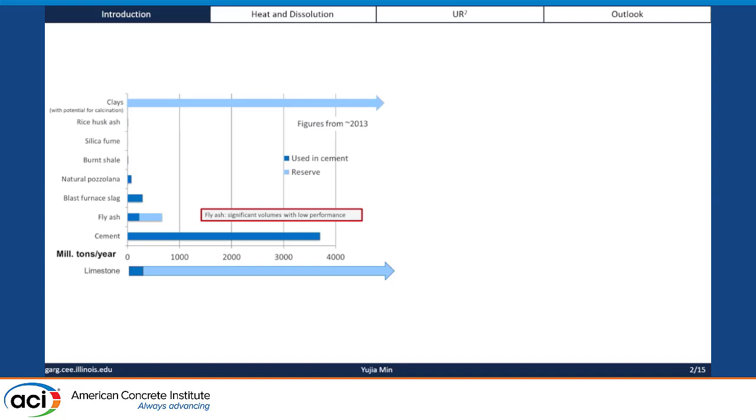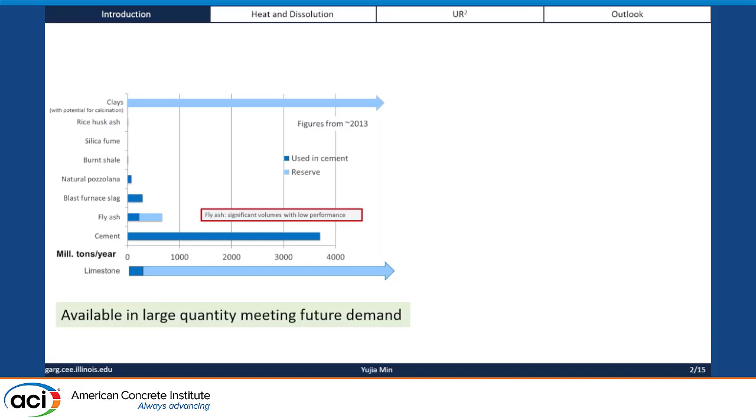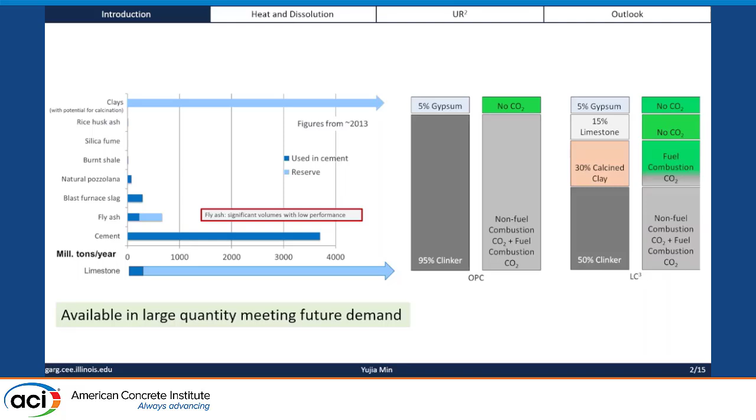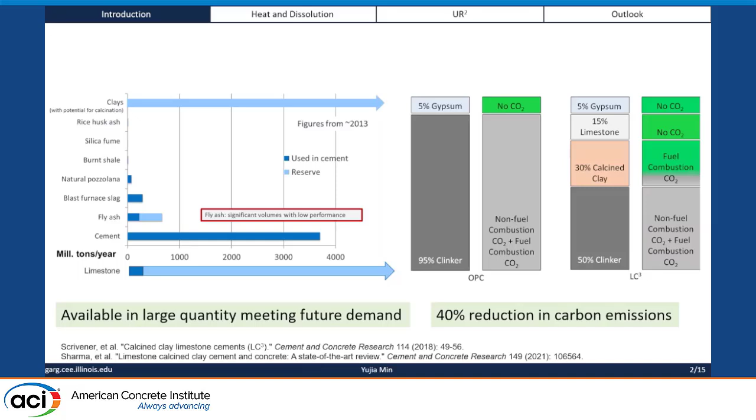So first, a bit about background. As many of you may know, the supply of traditional SCMs like fly ash is becoming limited, and people have compared the availability of different sources and concluded that natural clay minerals may be the only option that fits future demand for SCM. These clays are further developed into LC3, limestone calcined clay cement, which can replace about 50% of cement and decrease the carbon footprint by 40%. Considering this availability and sustainability, calcined clays are considered one of the promising future SCMs.

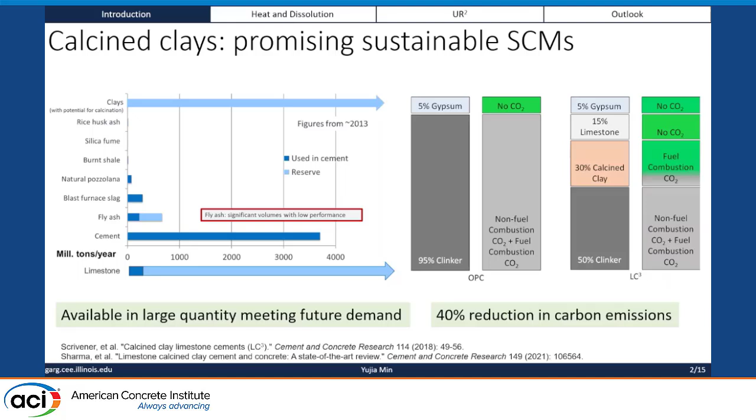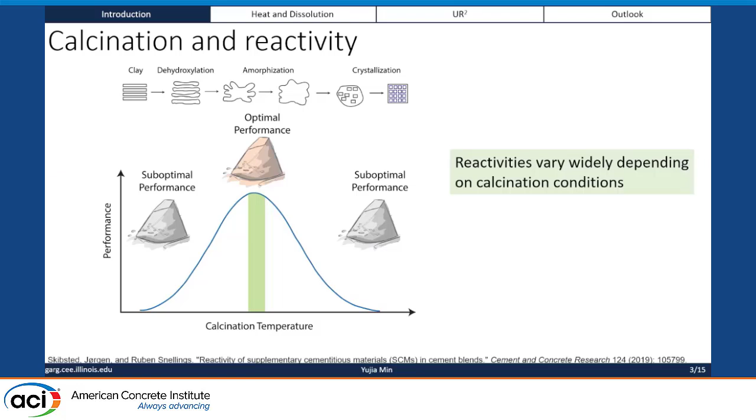But the problem is that these natural clay minerals are crystalline phases, so we have to calcine them, activate them at several hundred degrees C, and this crystalline mineral will become an amorphous material which gains proper reactivity as an SCM. But if we overheat them at a higher temperature, the amorphous material will recrystallize and lose its reactivity. Therefore, when we produce calcined clay, the production condition is very important. After production, we need methods to evaluate its reactivity, whether it's usable in concrete.

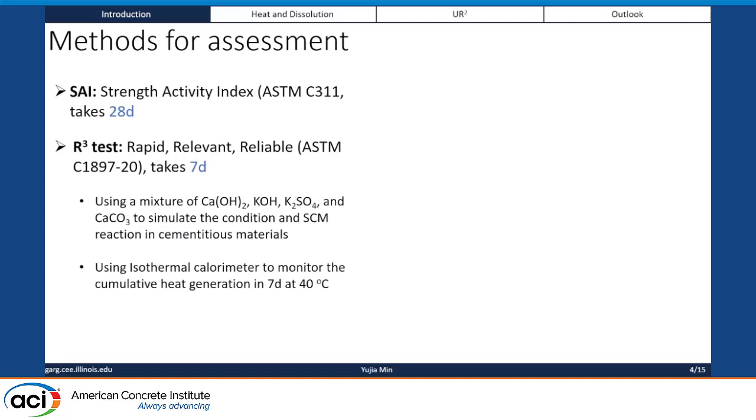The most widely used method is the strength activity index. This uses calcined clay to cast mortar and tests the strength after 28 days. For a faster method, the R3 test was developed. It monitors heat generation during the reaction of calcined clay, and takes up to 7 days to get results. People found that this 7-day heat correlates well with the 28-day strength, with an R-squared around 0.8.

But the problem is that for all of these methods, it takes at least several days to get results. During production, we cannot keep using a wrong production condition for a whole week. Therefore, we need to develop real-time quality control techniques at calcination plants, and currently we don't have such a proper method. The goal of this study is to develop such an ultra-rapid test.

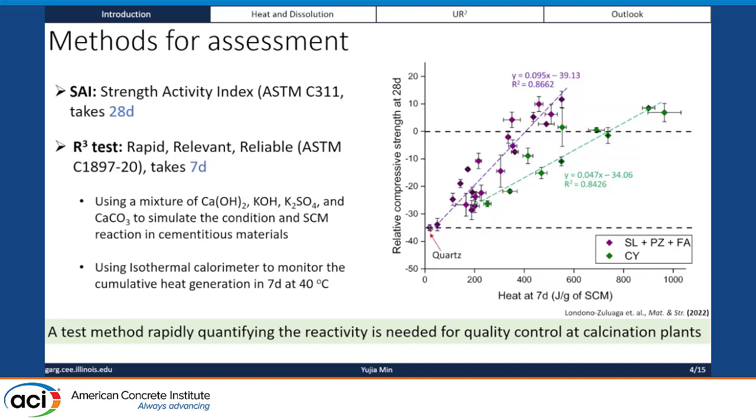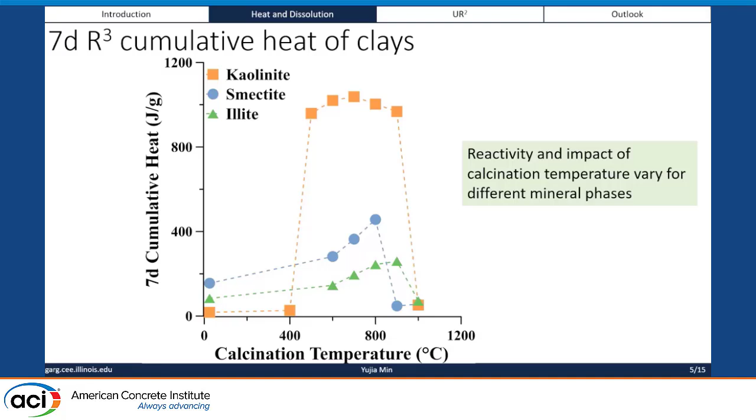So we first selected 3 different types of clay minerals: kaolinite, smectite, and illite. We calcined them at different temperatures and conducted the standard 7-day R3 test. The heat generation shows their reactivity. We can see that their reactivity varies widely among different mineral phases, and their optimal production conditions are quite different. In industry, real clay minerals may contain a mixture of different clay mineral phases and other non-clay phases. Therefore, we cannot estimate the optimal production condition based on experience alone—we need to develop a reactivity test.

We also looked at the kinetics of this R3 test. For some minerals like kaolinite, heat generates very fast within the first 1 or 2 days. But for other clays like smectite and illite, the reaction becomes slower and slower, such that even after 7 days the reactions are still ongoing. Therefore, for this method, you really need to run it for 7 days. We also see some crossover of those curves.

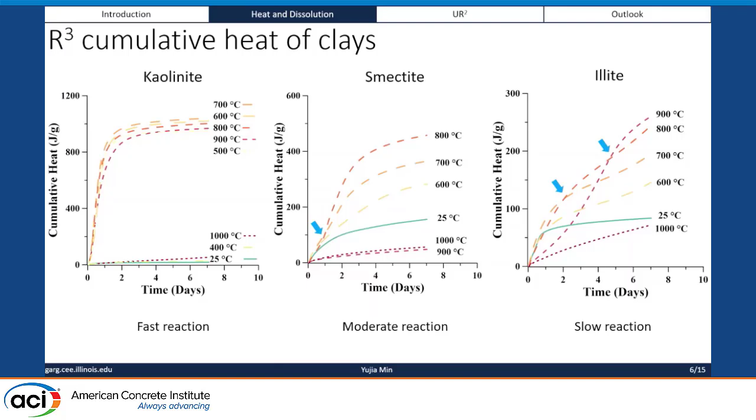The ultra-rapid method we are going to develop is based on the dissolution of the clays. For example, we dissolve these clays in diluted alkaline solutions, and we monitor the release of silicon concentration over the first 15 minutes of dissolution. We can see that only kaolinite calcined at proper temperatures will have very high concentrations of silicon released, and the reaction rate is also very fast.

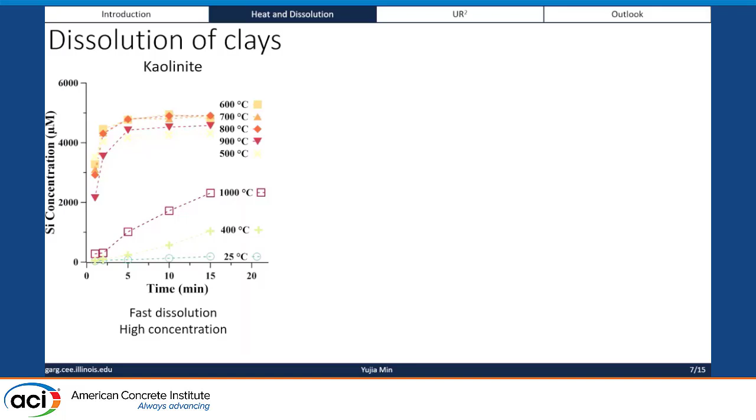Similarly, for smectite, we have a slightly lower concentration and a slightly lower release rate. And for illite, its concentration is the lowest, and its kinetics is also the lowest. These are all consistent with the trend of their reactivity, and we can also see similar crossovers of these curves.

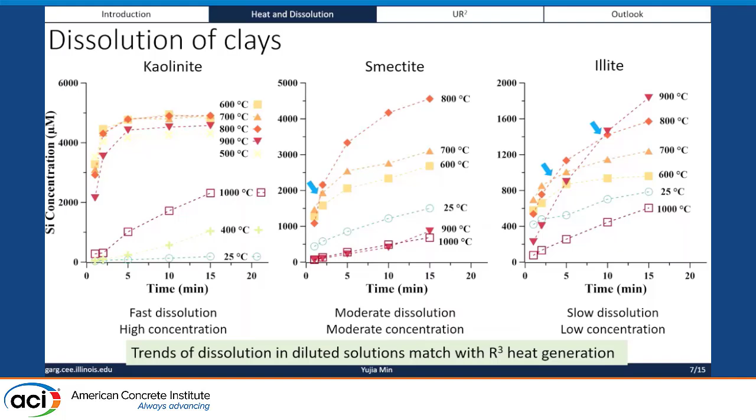The trend of the dissolution matches well with the R3 test. It's just whether they can be quantitatively correlated to each other so that we can use the dissolution to predict the results of R3 tests. So, for example, we do a linear regression between the silicon concentration released within 5 minutes with the R3 results.

We can see that there are some problems for those moderately reacted clays. Those are the smectite. We think it's because in smectite we have more silicon compared to aluminum, while for other

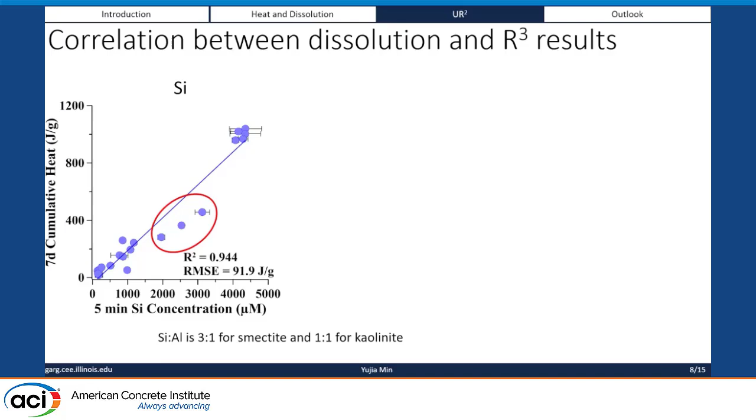clays they may have different ratio of silicon to aluminum. Therefore, we also want to consider the aluminum. But if we only use aluminum, we similarly will have a problem with those smectite. And we can combine silicon and aluminum together by adding their concentration up.

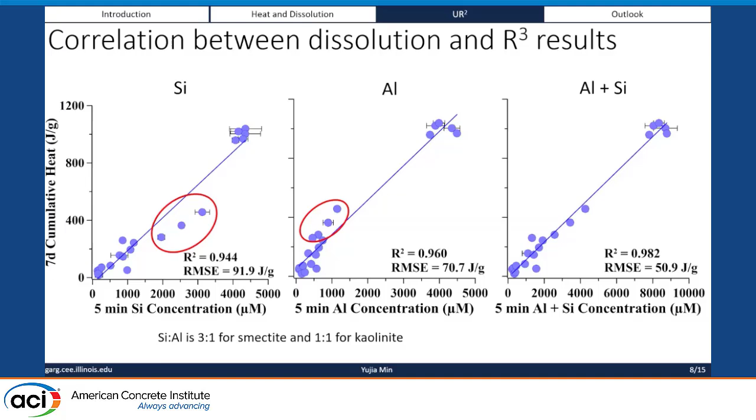But the problem is we are predicting the heat generation, so we want to consider what is the relative contribution of aluminum and silicon to the heat. Therefore, we checked some database, and we learned that the aluminum releases about 50% more heat compared to silicon. Therefore, we developed such a dissolution index.

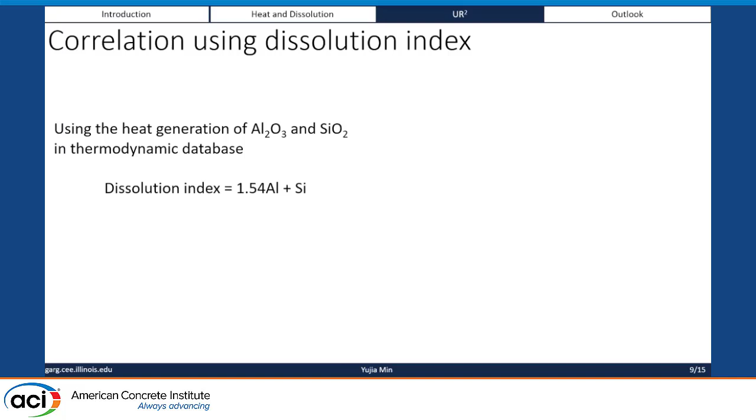Using this dissolution index, we get the best correlation, and now those smectite are completely on the line of regression. But all of these clay samples we prepared using the relatively pure kaolinite, smectite, and illite.

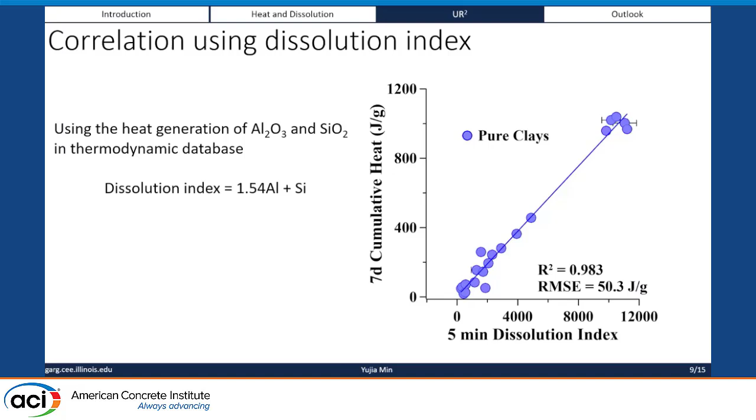Mostly this method still works, but with larger deviations. Especially some of the samples, we have more dissolution compared to the heat generation. We suppose this is because we are using relatively high temperature for the dissolution. Therefore, some of the crystalline impurities like quartz, they may also have a little contribution to the dissolution.

And what we get is the sum of the dissolution of amorphous and crystalline phase. To separate the effect of those crystalline impurities, we also dissolve the sample before the calcination. And then we subtract their dissolution from the original results. In this way, we can get the dissolution of those amorphous material, which are the SCM that we want to test.

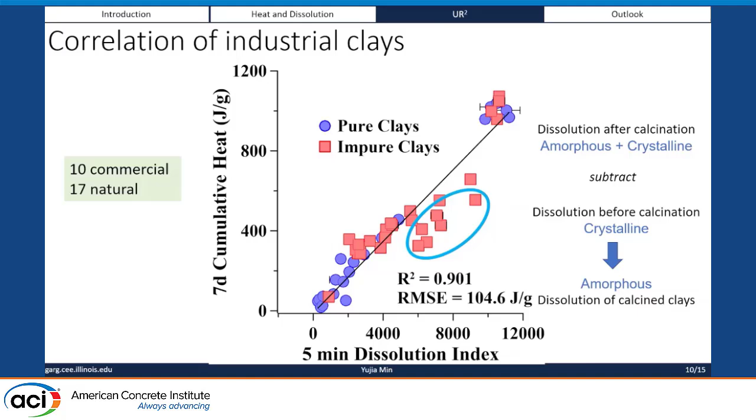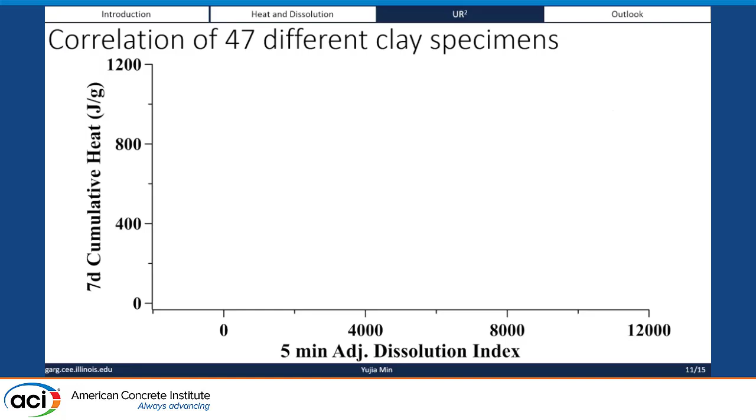With this adjustment, we get a 5-minute adjusted dissolution index, and we similarly do a linear regression for all the 47 samples that we have. And now we are able to improve the R-squared to about 0.92.

So in this way, we can use something that can be measured within 5 minutes to accurately predict the results of the standard 7-day method.

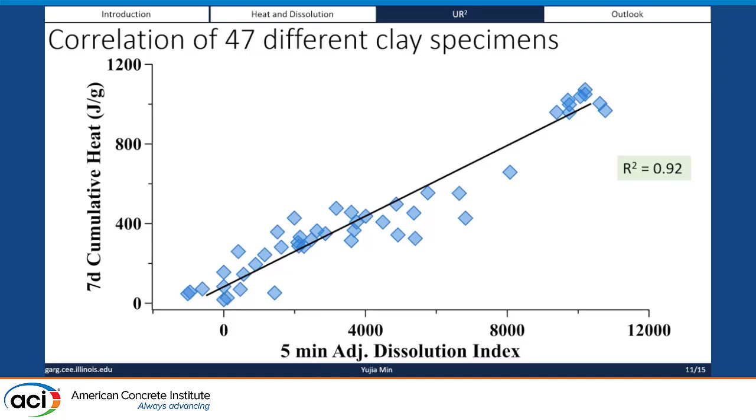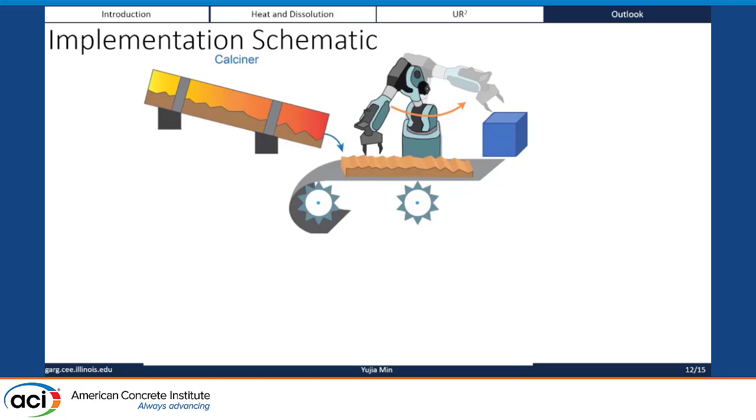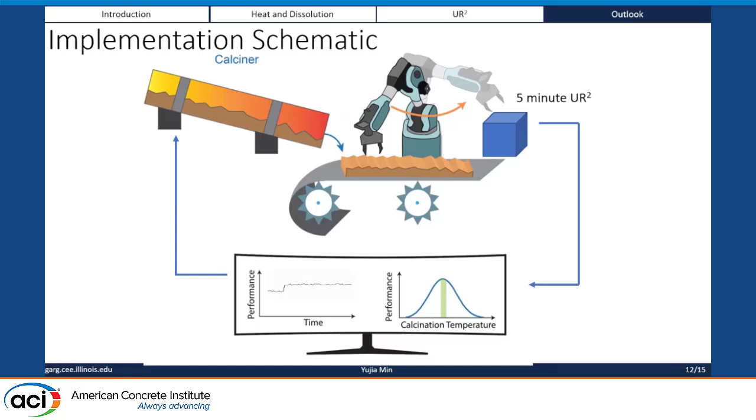We suppose that this can be deployed as a real-time quality control method at the calcination plant, that when the clay coming out from the calciner, we can continuously take a sample on the conveyor belt every 5 minutes and conduct our test. This test will monitor the performance of this material in real time, and will also provide feedback to help us adjust the production condition to ensure consistency in the quality of the product.

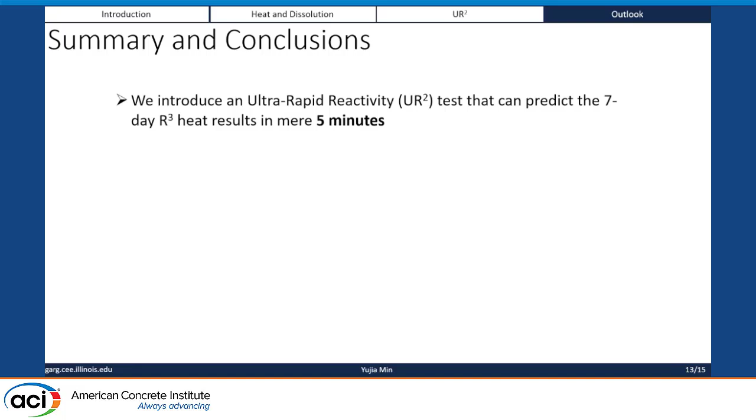So as a summary, we have developed a UR2 method that is able to predict the reactivity of calcined clays within 5 minutes. And for a wide range of different samples, we get highly consistent results with the industrial standard methods.

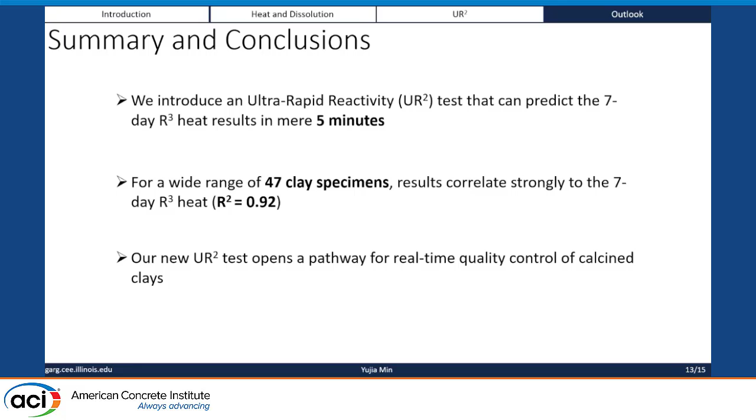So this UR2 method has the possibility to be deployed as a real-time quality control method. It can help us save more fuels and also save more materials by avoiding over-calcination. And it also ensures the consistency in the quality of the product. This can help the deployment of this new sustainable SCM in the cement industry.

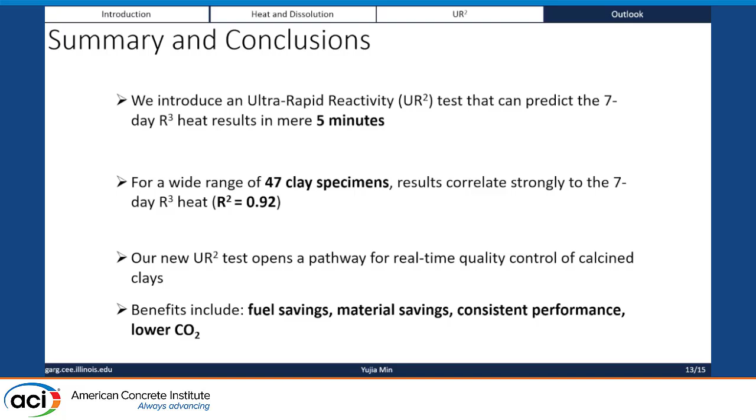Finally, there are many people asking us whether these methods are applicable to other SCM. So we also tested other traditional SCM like fly ash. We tested 37 different Class C and F fly ash. And we see that similarly, this method is also applicable to other SCM.